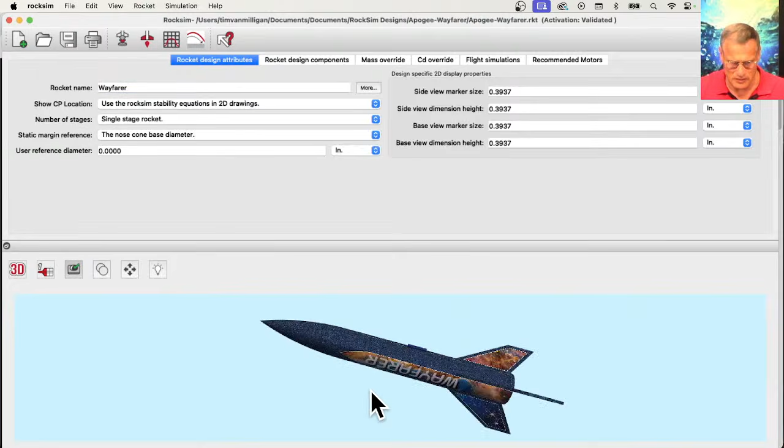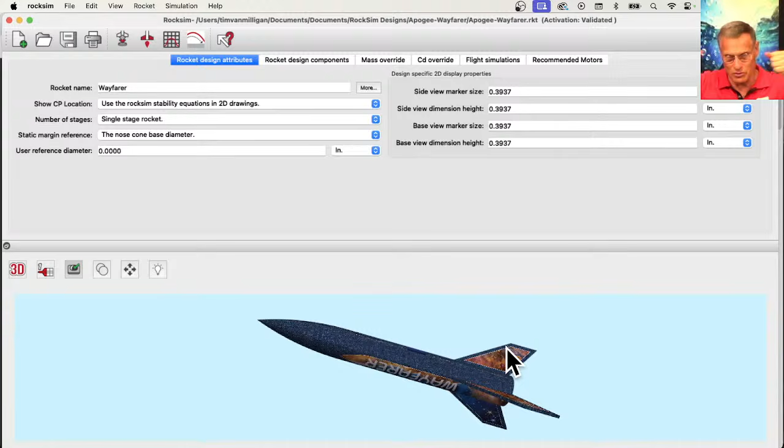And actually, these have decals, and the decals are vinyl, but it is a skin. They almost completely cover the entire fin. So technically, you're skinning the fin when you put a decal on. It doesn't add a lot of strength though. With vinyl, the advantage is you get a nice smooth surface, it's really glossy, and you can print on it and make a beautiful decal. The disadvantage is vinyl is stretchy, so it doesn't have much strength. A little bit, but not enough to do anything.

So how would you do this in RockSim? Let's go to the design components. I've got three fins here, and we did three fins because we wanted a different decal on each fin. You can see this one is like a nebula of stars, and this one is more individual stars. There's a couple ways to do this. The easiest would be just to add a mass object.

So you open up your fin, and you'd weigh your fin. You put your skins on the fin, and then you just weigh it. Then you come over here to the mass override tab, click on that, and give it a mass. Right now, RockSim calculates that mass at 1.176 grams. Say you skin that, and now it's 2.5 grams. So you'd put 2.5 grams in there, and then you have to give it a CG.

So you take your fin, before you put it on the rocket, and you balance it. You find out where it balances along the root edge, the edge that is glued to the tube. You measure down from where it starts to hit the tube to where it balances. This is a trapezoid fin, so where it balances is a little tricky, but you can figure it out by balancing it on your finger and using a ruler to measure back.

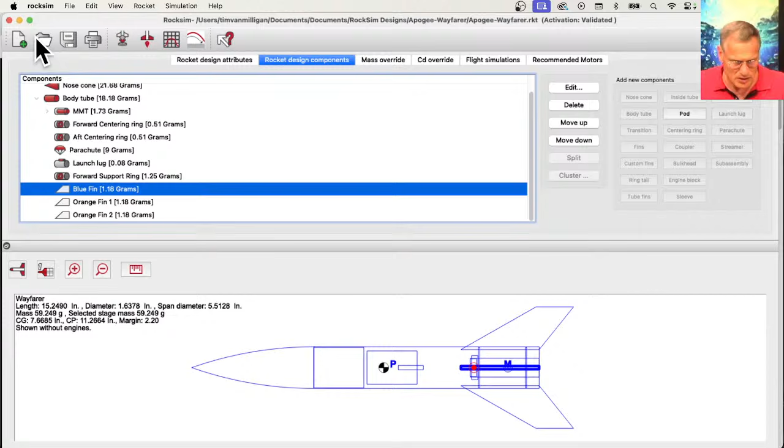Actually, I'm going to open up a different rocket, because all the fins are different fins. Like I said, we split them up. So I'm going to look for a different rocket, just so that we're working with a fin set and not individual fins.

I'm looking for something smallish. Quest Sport. I'm not even sure. I'm sure that's small. Save my changes. No.

Okay, so here is the Quest Sport, and we look at it from the back. This one's got 4 fins. Okay, we look at it from the back. You can see the 4 fins. If we look at it from the side, we can see our fins over here.

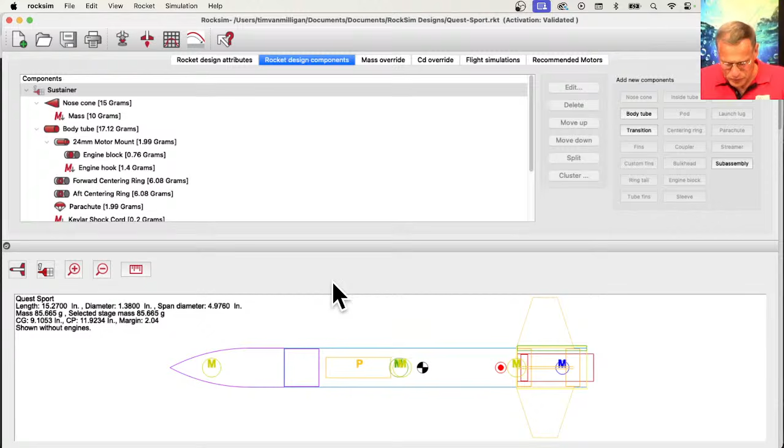So the first thing is, I'm going to change this to a 3 fin so you can see. So I'm going to go to the rocket. I'm going to stay in the rocket design components, highlight the fin set, and double click on it, and it will open up the editor. And from the editor, I'm going to change it to 3 fins. You can see all of a sudden it's 3 fins. And if I look at it from the back of the rocket, you can see 3 fins.

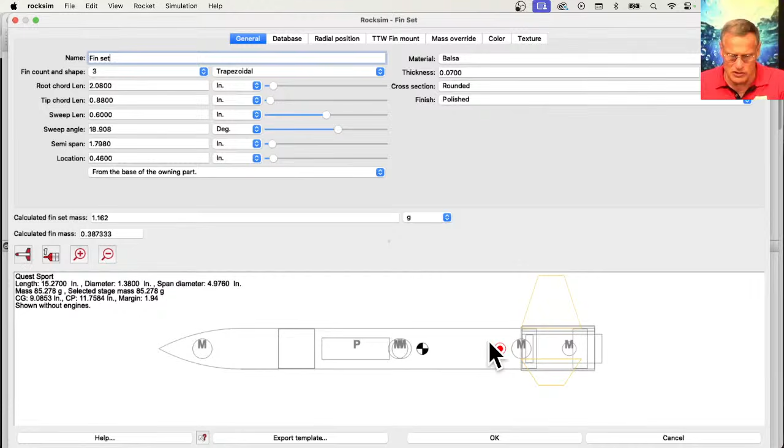Okay, I'm going to look at it from the side. Okay, so here's the big difference between 3 and 6 fins. So 3 fins puts the center of pressure right here on the rocket. And that's important, because we need the center of pressure to be behind the center of gravity. Here's the center of gravity. It's this symbol. Here's the center of pressure.

So at center of pressure, if you look over here, we're at 11.75 inches, and that's measured from the tip of the nose cone. So from here to here is 11.75 inches. Now, if I change this to 6 fins, now, did you see that move? It moved from 11.75 to 12.34 inches back. So adding more fins, which is what we expect, is going to make the rocket more stable. So if you need to make your rocket more stable, one of the techniques is to add more fins.

Now, the downside of adding fins is it also increases drag. So adding more fins makes it more stable, but it also means it has more drag. More drag means it's not going to go as high or as fast as a 3-fin rocket. So if you want altitude, you want to minimize the number of fins, and 3 is the minimum for a stable rocket. And I say that with tongue-in-cheek because we have talked about 2-fin rockets here before. Technically, 2 fins would be less draggy, but it depends on how you do it.

Here's the thing, though. Let's run a simulation, and I'll show you. So I got it at 6 fins right now. Click OK, and we're going to run a simulation. So I'm going to click on Prepare for Launch. And we're going to choose an engine. I want it to go really high. So let's choose an Aerotech E18. And I'm going to say 7. But I'm going to say deploy at Apogee because I want it to go as high as possible. I don't want it to deploy before Apogee. So I'm going to say deploy at Apogee.

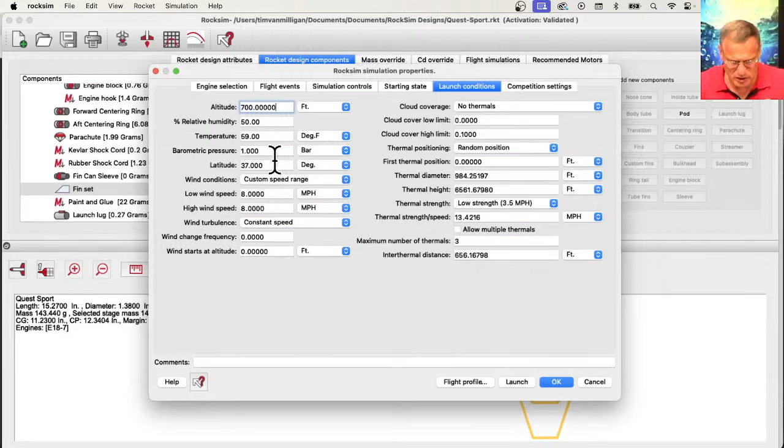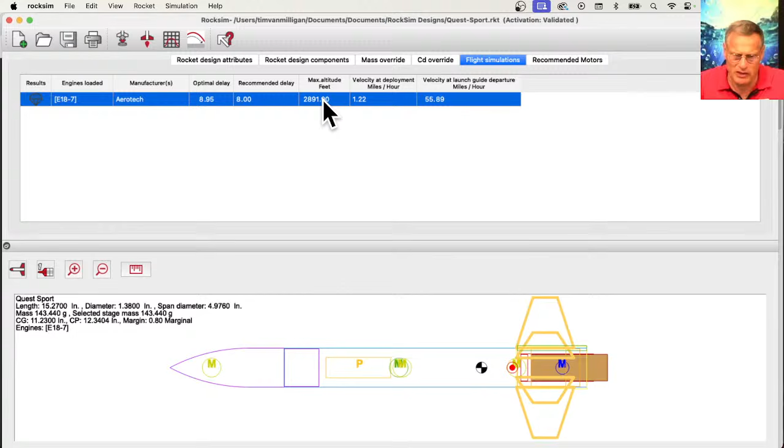Let's see what my flight conditions are. We got an 8-mile-an-hour wind. And let's just launch it and see what happens. So that's how quickly you can set up and launch. Okay, so this motor with 6 fins went 2,891 feet. So now let's go and change it to 3 fins, and I expect that number to be higher. So I'm going to go back to the design components, click on the fin set, change it to 3 fins, and click OK.

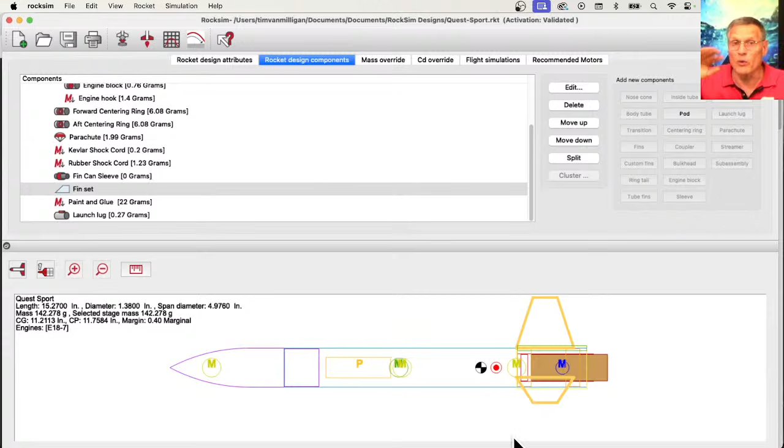So now, changing it to 3 fins changed 2 things. First, it changed the drag, which we expected. Also, it changed the mass of the rocket because 6 fins weigh more than 3 fins. So we're going to ignore that. We're only going to say it's changing the drag. And what we do is we run another simulation. I'm not going to change anything, so I'm just going to push the launch button a second time and just let it run a simulation. Nothing's changed.

And so this time, the 3 fins went 3,313 feet high. So 3 fins did go higher than 6 fins. But again, the caveat is 3 fins weighs just a little bit less than 6 fins. So that's the discussion on do you want to use 3 fins or 6 fins? If you need stability, add more fins. If you want to go higher, take fins off. Yeah.

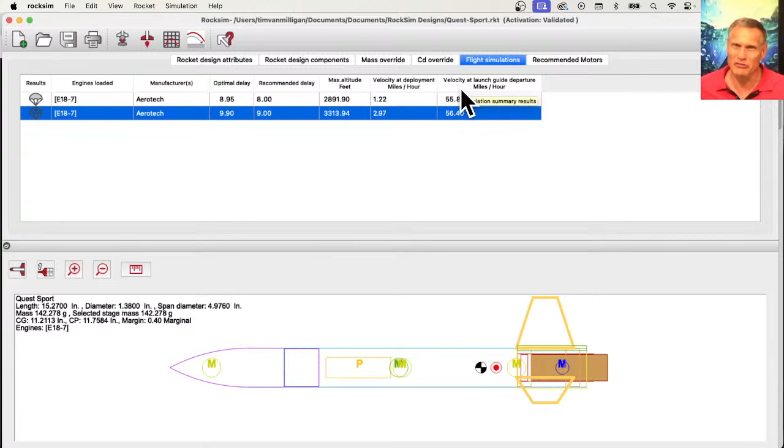462 Tool says, another question. Our rocket club is now requiring tracking on any rocket going over 3,000 feet. Do you have any recommendations? Well, of course.

So the question I have for you is, what kind of tracker? Does it have to be a GPS tracker? Or, because we sell different kinds of trackers.

If you go to the shop menu on our website, come down here to electronics and payloads. Click on that. And then come over here to rocket. You'll see there's rocket locators. And we'll click on that. Okay, so here are the devices for locating your rocket.

And the simplest device is this one here called a micro beacon. And what this micro beacon does, all it does is it just makes a noise, and it makes like a siren noise. So, ooh, ooh, ooh, ooh, and it's really loud. Does it tell me how many decibels? I'm sure it does in here somewhere. Doesn't tell me. But basically, you attach it to the base of the nose cone, and when the nose cone comes off, now it's out in the air and it makes a noise.

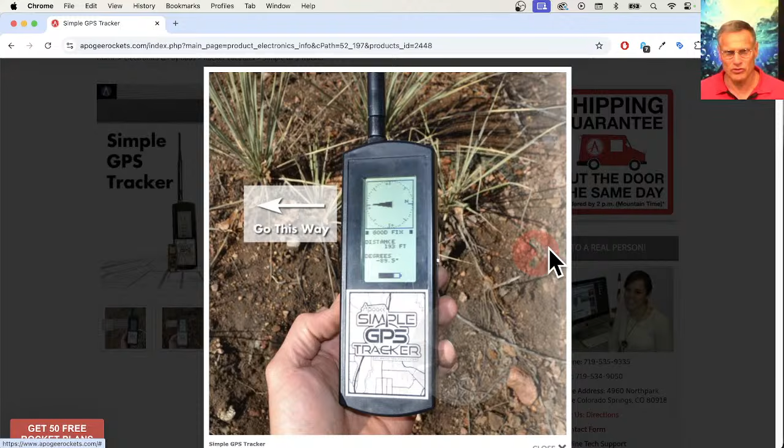And if you keep walking in that direction, you'll eventually stumble upon your rocket. Just walk where the arrow is pointing. And that's why we call it simple, because you just put it in your rocket, turn it on, and launch it. Now we have other devices. We have the Featherweight GPS tracker.

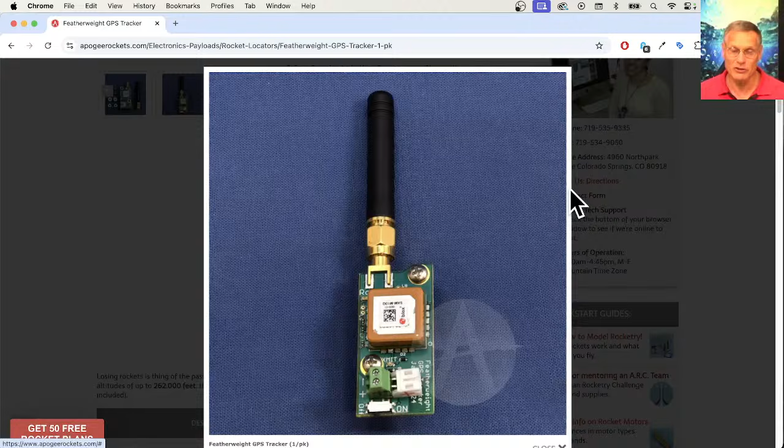This device requires you to have a ground station. And then on top of the ground station, it needs to have Bluetooth connection to your phone. So you need your phone, you need the ground station, and then you need the part that goes in the rocket. And these are nice. They're beautiful. Let me see if I can show you the ground station. So the ground station looks like this. And we sell the ground station as well. You know, it looks like that.

It's got a little battery in it, and it uses Bluetooth. And it just connects to your phone. And then on your phone is where you have the application that tells you where the rocket landed and gives you a map to go find your rocket. They're beautiful devices. Can't say enough about them. They're a little bit more involved than the simple tracker, but they're still easy. And then we got other devices.

Okay. This one is the TeleGPS. This is similar, but here's the device you put in your rocket. But you also need to connect it to a battery. Again, you're going to need a ground station and an antenna on your ground station, and also you can connect it to your computer, so you need to bring your computer out with you. I think they have an app for your phone as well.

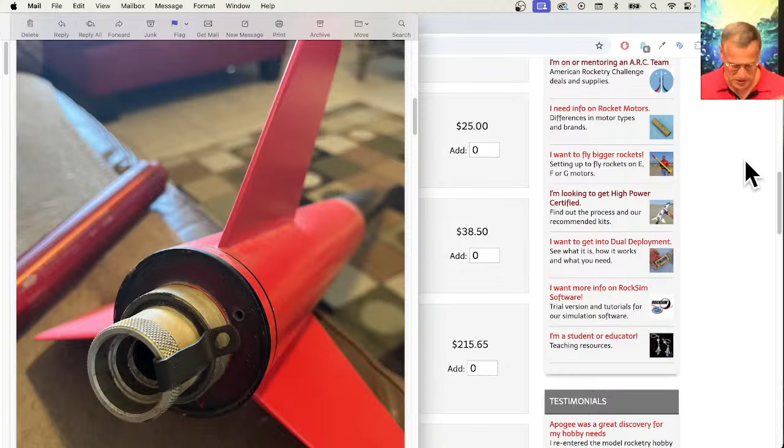So his question is, this is the kind of retaining system I have in my rocket. What's the best way to do a 29 millimeter adapter in a 38 millimeter mount? I've been thinking about this because this email came in right before this episode. If you go to the Apogee website, there's a number of options. So on the website, go to shopping, come down to building supplies, and go to motor retainers and hooks. There's a couple of different options.

The Kaplow clip is kind of sort of like a plate retainer. A plate retainer is like a metal disc, and these are made by Mad Cow, a piece of sheet steel that's been machined to that dimension, and I don't have a good picture of it, sorry. You screw it into the bottom of your rocket, and then you can capture the motor from both sides by this metal clip.

So basically, if you have those screws in there, you theoretically can use a 29 millimeter if the hole spacing is the same. That's the question: does this hole pattern on the 29 millimeter match the 38? If they don't match, then you got a problem, and I would say don't use them. But those are cheap.

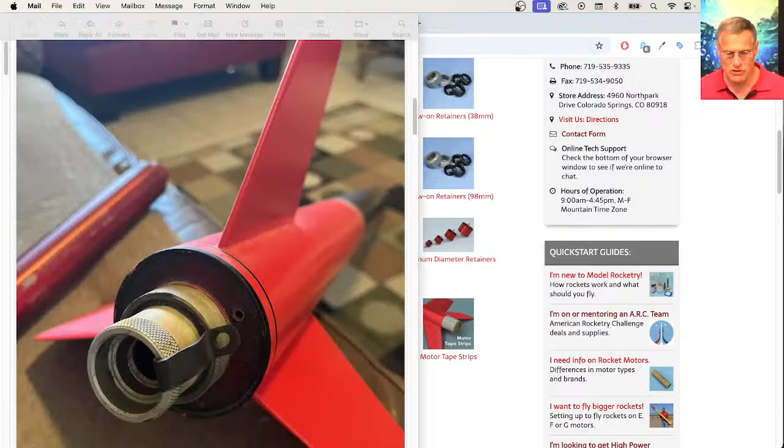The third option I would say is you can, let's see if I can unclick on this, is to find some metal and make your own clips that will attach to a 29. So basically you're using the same screw holes. So what I would do

is find a metal can, like, you got green beans, and take a pair of tin snips, the really heavy duty scissors, and cut out a rectangle, and then take a pair of pliers and bend it to the right shape, and then drill a hole in it, and basically you've recreated the Kaplow clip.

Ideally, you'd want it a little bit thicker, but steel is strong, even a steel can. I'm sure it's going to hold. You just don't want it to flex where it will let go. But steel is, you know, if you could find steel that's just a little bit thicker. I'm just trying to think of a consumer product that you can buy that has a thicker steel that you can cut and make your own clip.

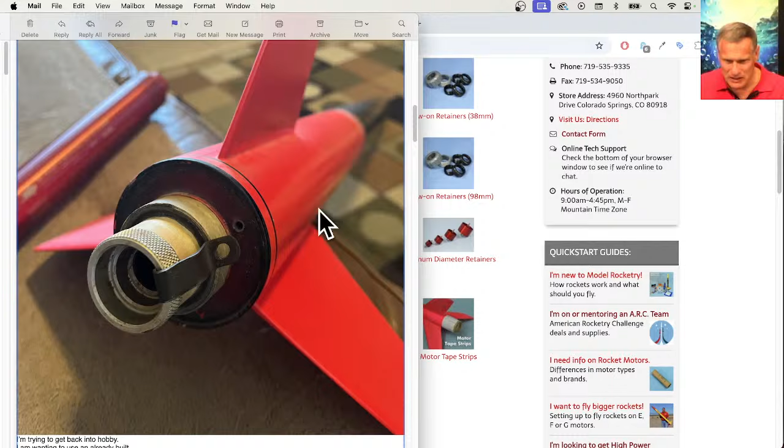That would probably be the cheapest and the simplest, but you do have to do a little bit of bending and drilling. But it would be cheap. It would be dirt cheap. All right. So that answers that question.

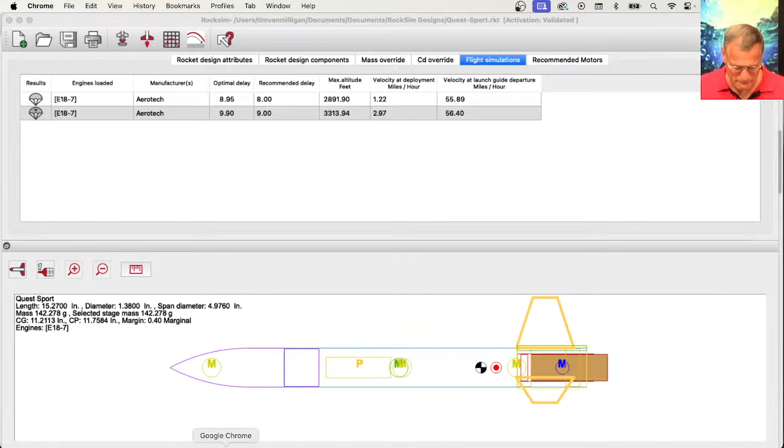Any other RockSim questions? So we got RockSim going on here. This is what we're here to talk about today. So let me bring up the launch visualizer. So I'm going to open up and close some windows here. And you go to rocksim.com is the launch visualizer. And when you get here,

okay, so this is what it looks like when you first get here, and it's going to load in a generic rocket, and it's the Apogee Avion. You can see it's on the pad, and this is three-dimensional. I can spin it, find the right key combination. There we go. Hold down the shift key and click, and then you can rotate it around.

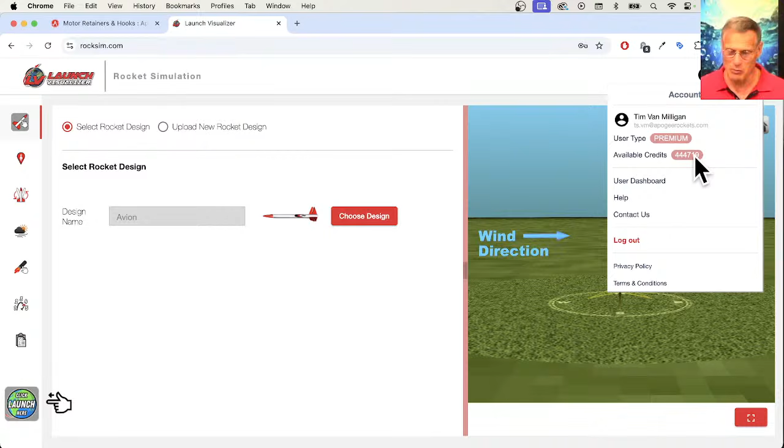I'm going to log in so I can use my account. And let me log in. Sign in. Okay, so once you're signed in, it'll tell you that you're signed in. It tells me I'm a premium and I got this many credits. So 1 credit is worth 1 Newton second. So a C motor would be equivalent to 10 Newton seconds. So I've got a lot. I've added a lot to my account so I could run a lot of simulations.

So let me load a select rocket design. So there's 2 buttons up here. You can upload a new one or select one. I hit choose design. I'm looking for FAI rocket. So FAI stands for, it's a French word, so it's, I don't even know what it means.

But it basically means it's the organization that runs international aviation events. Anything that goes up in the air, hot air balloons, gliders, model airplanes, model rockets are all covered by the FAI. So if you want to create a world record, you go to the FAI. And the FAI sanctions international competition. So that's why it's sanctioned by the FAI.

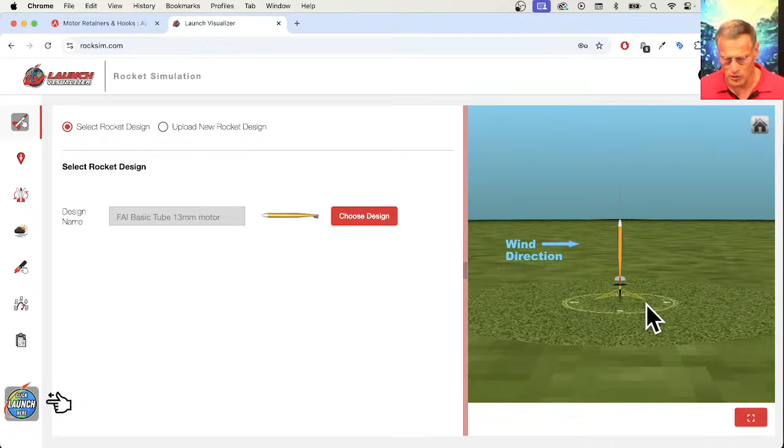And so I'm going to select an FAI rocket, and this is the kind of rocket that we're going to fly at the competition. So this rocket right here is your basic rocket. So you can fly it as a streamer duration rocket, a parachute duration rocket, and you can also fly it as a helicopter duration rocket if you put the blades on the inside, which is what we all do.

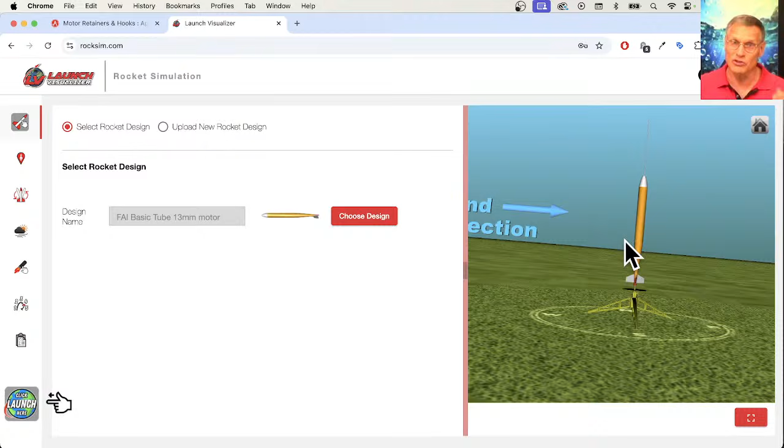So what I wanted to show you was on the launch site, it's going to load the maps, and I'm waiting for it to load. There we go. It's got to connect to the internet. This is our launch pad in Pueblo, Colorado. Let me make this map a little bit bigger. That's as big as you can make it.

So if I swing it around, so north is at the top, it will be more oriented. So the black arrow points to the north, and then I can zoom out. And what I'm looking for is the launch site in Serbia, because I put that launch site into the launch visualizer so that anybody that's going over to Serbia can run their simulations on the launch site that we're going to be at.

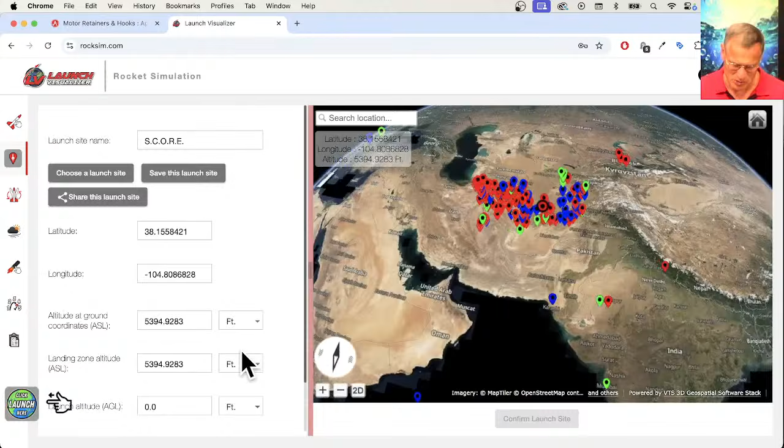So there's Africa, and my north got moved. So all these pins are actually on the opposite side of the world. But there is one pin in Serbia. Okay, so where is Serbia? Serbia is right over here somewhere. I think it's right here. This green one right here. Yep, here it is. The FAI site, Aradac, Serbia.

So it's west of Bulgaria and east of Croatia. So we're going to be flying into Belgrade, and then we got like an hour and a half drive to Zrenjanin, however you say it. And this is the launch site right there. Oops, I went too far. My launch site is right there. And it's actually, my launch site is in the air. So, confirm launch site. So this is the launch site we're going to be launching from.

And when I go to a launch, I want to know what the terrain is like, because I want to know how hard it is going to be to find my rockets. So to me, this looks like a really nice launch field. It's got a lot of grass. I don't think those are trees. It's darker color, but I don't think that's trees. It might be a swamp or something. So over here, we got some farmers' fields.

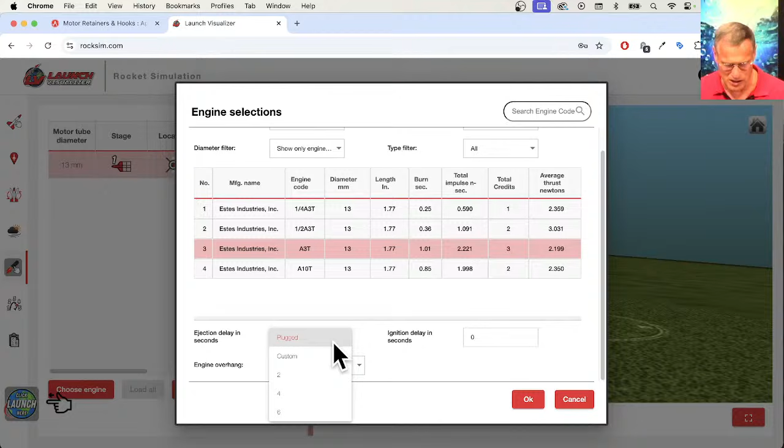So this is where you'll go to choose your engines. The unfortunate thing is we don't have any of the international motors. So the closest I can use is an Estes A3. And I'll choose a 4-second delay. Click OK. And then we're going to launch. So the launch button is down here in the bottom left corner. And we launch. And I'm only using 3 Newton seconds. So simulate that.

And it's running the simulation in the cloud. And it was successful. Oh, my rocket all changed shape. But look at this. It's in the air for 3,600 seconds. Wow. So what happened there, man? I didn't go that high, did I? 300, 400, 400 feet. I wonder if I got a big old parachute in here. All that white stuff right here is smoke, so I'm just waiting for the smoke to clear.

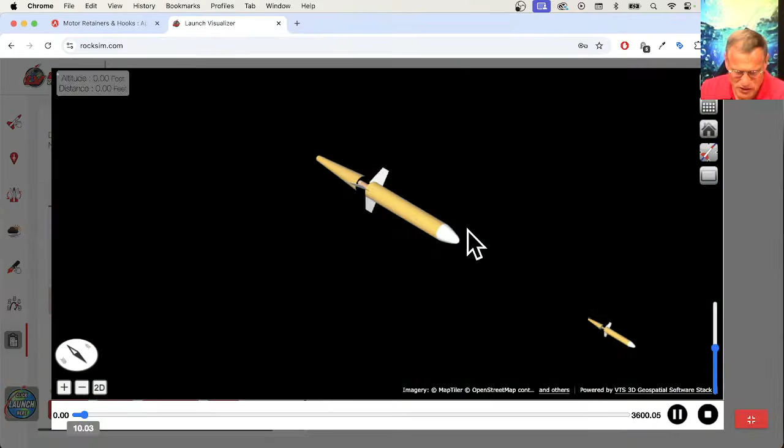And then all of a sudden my background turned black. So what happened there? Am I underground? It says I'm at an altitude of 0 feet. Okay, so we're at 353. And then we jump to 0. So something happened. Let's try a different rocket.

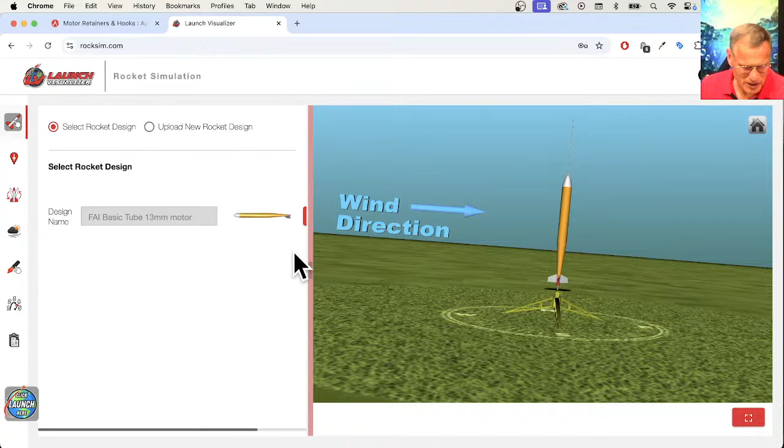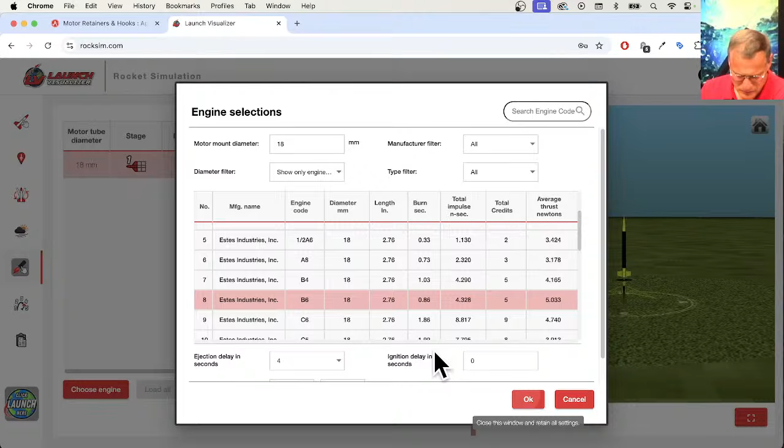So to try a different rocket, close that screen. Let's go to select rocket. Let's choose. I'm going to move this over so I can hit the choose button. Choose a design. Let's choose something else. How about an Apogee Apprentice? Select that. And we'll choose a different motor. We're going to keep the launch site the same. Choose an engine. B6-4. Click OK. And launch. And it's got to simulate.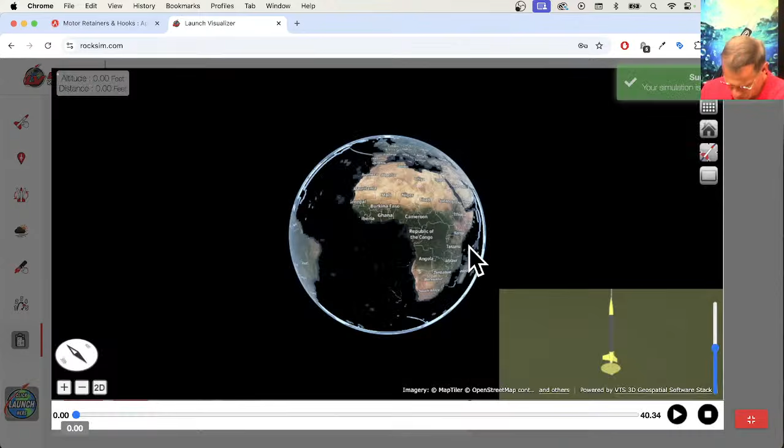Okay, so this one's going to be in the air for 40 seconds. So the rocket's taking off. We're seeing smoke and fire. I'm zooming out a little bit so we can kind of see. Oh, there's the parachute. And I think we could have gone higher.

And the rocket is right here right now. And it's going to be in the air for 40 seconds. I'm going to grab the slider and move it to 40. And then I want to show the trajectory, so I'll come up here to Settings, and then show the trajectory path, and click OK. Okay, so here is the trajectory path.

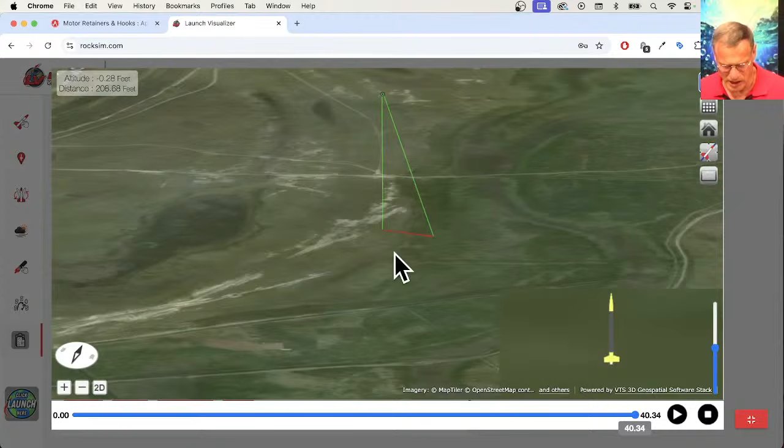So there is where the rocket was launched. It reached peak altitude right there, and then came down and landed here. Landed a distance of 206 feet, so that's pretty good. Yeah, I like this launch site because I don't think there's going to be any hazards as far as collecting rockets, no matter which direction we go, although if it lands over here, I don't know what's growing.

These are crops, so what is the farmer growing? That I don't know yet. So if the rocket catches a thermal and lands over here, what's it going to land in? This might be a good idea for a tracker.

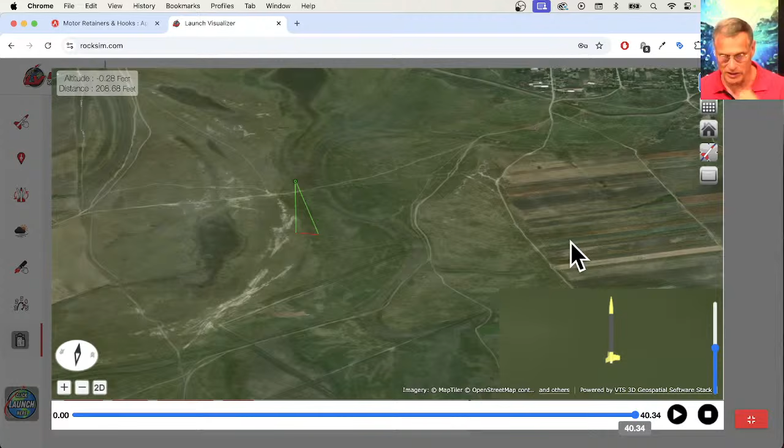But this distance right here is 200 feet. So, multiply that by 5, and here's about 1,000 feet. Here's about 2,000 feet, which is about a half a mile away. So if we get more than like 1,500 feet, we might be in these crops. Again, depends on which direction the wind is blowing.

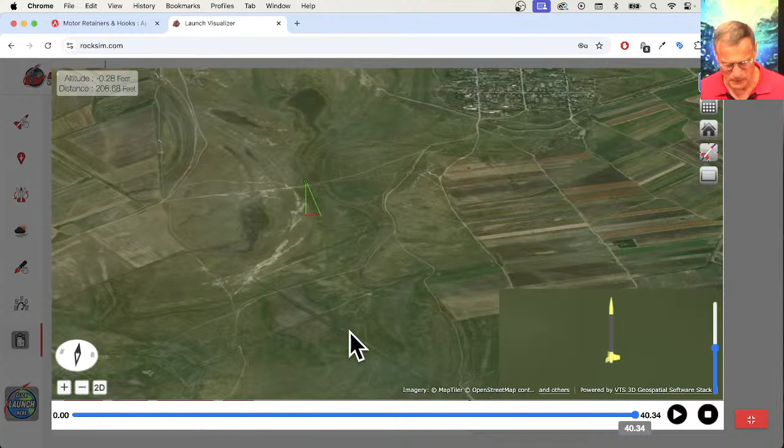All right, no more questions. Well, it's almost 3 o'clock. So this launch site is in the launch visualizer. And I added another one this week. I found out there's a Tripoli club down in Argentina. You didn't think there was a Tripoli club. I was asking, how do they get motors down there?

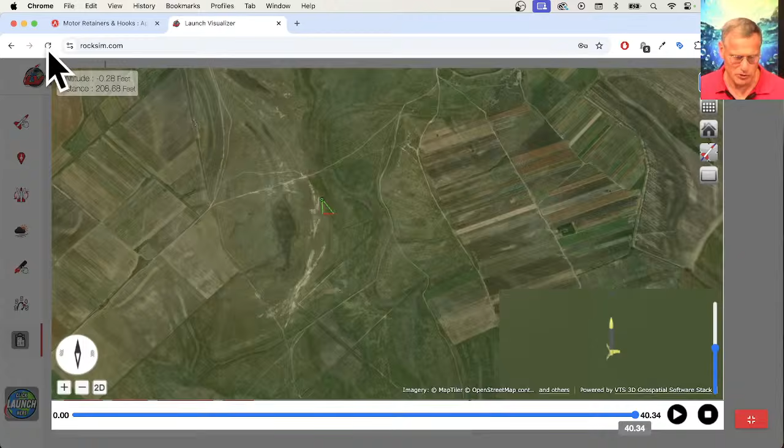Well, let me click on that button. So if you have any problems, since the software is not on your computer, you just hit the refresh button, and it will reload everything. And now it's starting to work. So go to the launch sites. My computer's acting really slow. This is not the website. This is my computer. Now it's reloading everything.

Okay, so the launch site. And let me see, let's type in Argentina. Oops, I want to choose a launch site first before I can search. There it is. Experimental Rocketry and Modeling Association of Argentina. So I'm going to click OK on that. And it will take me down to South America.

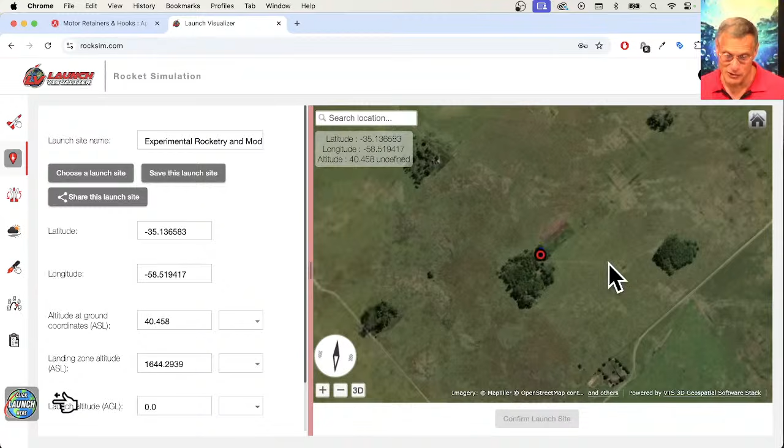And I just got this launch site this week. I was corresponding with a person that lives down there. And he's an Apogee customer, of course, even in Argentina. Yeah, and the coordinates he gave me is a clump of trees. Really? You're launching from a clump of trees? But everything else around the trees looks pretty good. Just kind of zooming out here.

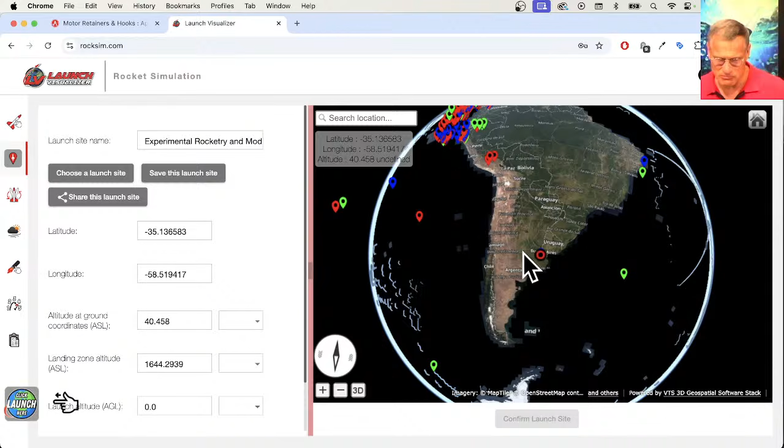Okay, so there's Buenos Aires, Argentina, and it's just kind of almost due south of Buenos Aires. So if you're unfamiliar with the shape of Argentina, there it is in South America. And they're at a latitude of minus 35 degrees. So their latitude is like, because Colorado Springs, our latitude is in the 30s.

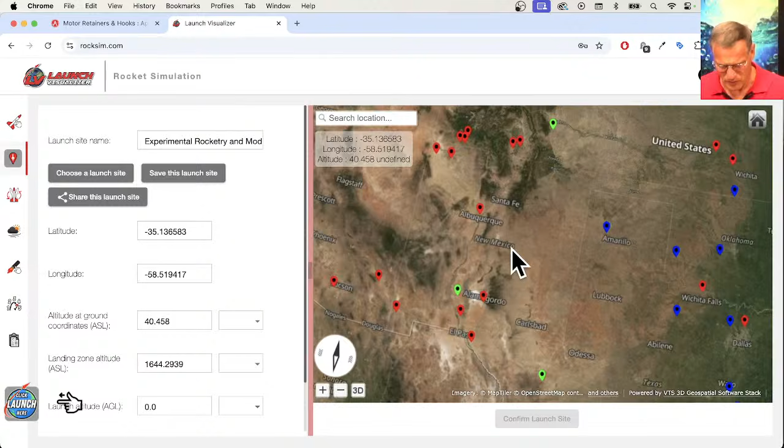So they're actually closer to the equator than we are here in Colorado Springs. They're even closer than Amarillo, Texas. Still a latitude of 35 degrees. And that's like, come on, don't spin. I want you to rotate this way. It wants to spin. Anyway, so you get the idea.

So their weather must be fairly similar to what ours is here, although right now they're in the winter time. So I wonder how cold it is there. This is just going crazy. Anyway,

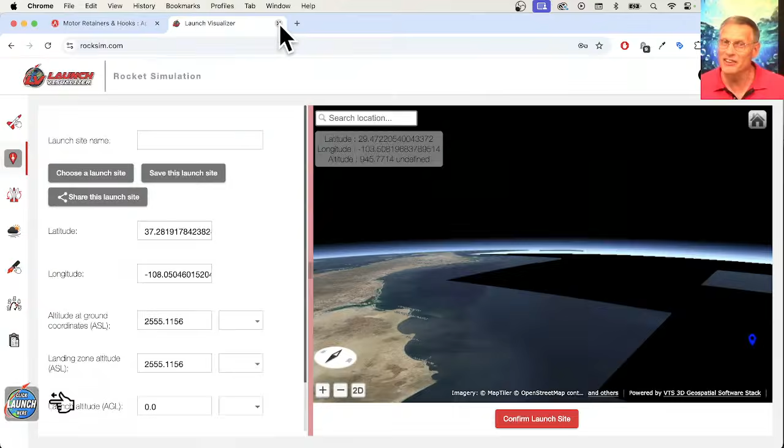So I think we'll close out because we're at 3 o'clock. Had a lot of fun. We talked about 3 fins versus 6 fins. We talked about skinning fins, doing launches in Serbia, doing launches in Argentina. With the launch visualizer, you can launch anywhere you want in the world, as you saw, which makes it really

cool. And, you know, what I look for is I want to scout out what the field looks like, so that I'm prepared. So I don't think I'm going to have to run through any forests, probably, but I don't know if there's any marshes that I need to wear boots for. That's a good question. So something that I can't ask, but you can ask me when I get back. All right, no other questions.